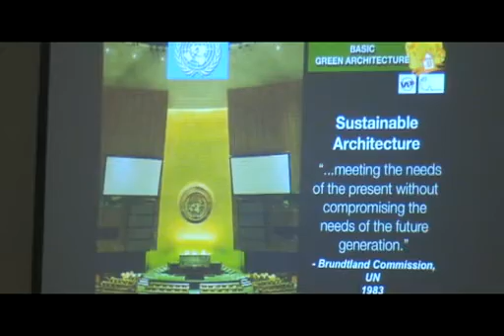This is sustainable architecture. This is the definition that's worldwide accepted. It started in 1983 by the Brundtland Commission, the UN Brundtland Commission. It says meeting the needs of the present without compromising the needs of future generations. In layman's terms, whatever resources we are using today, let's save some for future generations. It's about being unselfish.

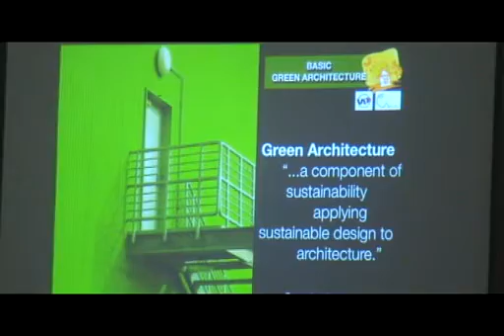What is green architecture? This is the definition from GAN, from our next speaker later. It says it's a component of sustainability, applying sustainable design to architecture. There are many elements of sustainable development and sustainable architecture, so green architecture is just part of the sustainable issue or development.

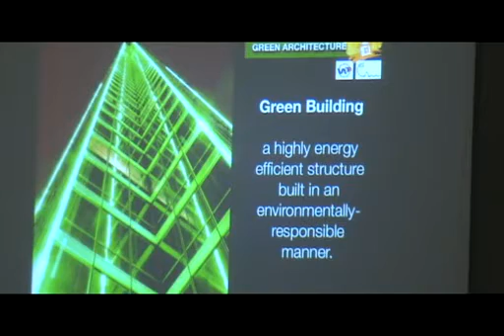What is a green building? A green building is a structure that is very efficient in energy, very healthy also, and environmentally sensitive. And green design is a process where the end result is sensitive to the environmental impacts on all living beings.

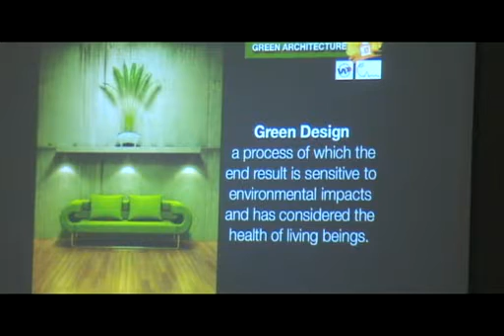Why green architecture? A lot of people are saying, let's not do green architecture, let's just do what we learned back in college. But remember that change is constant, so we have to accept change.

There are 3 major environmental crises identified. This is the generation wherein we have to cure this crisis, or give solutions to the crisis we are now facing. Number 1, energy crisis. If you go to the internet, peakoil.net, there's a whole blog exchange of information.

The scenario is scary because it says gas is already running out. There are many reasons why Arab countries are developing their tourism, and it has something to do with the dwindling gas resources. It says there's a prospect of both oil and gas shortages in the rest of the world, and the first ones affected will be developing countries - that's us. It's a scary scenario if you look at it.

The second major environmental crisis is water crisis. In the Philippines we say we have a lot of water, we won't run out. But remember the Aral Sea? It was irrigated, and now it's very dry. It was the fourth largest lake, a body of water, but now it's totally dry. So it's true that water is running out.

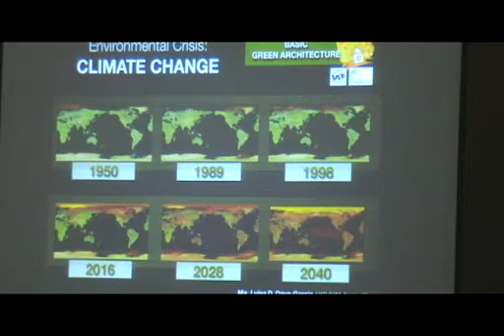This is the biggest challenge of all - climate change. These are charts. In the 1950s, this was the recorded heat. You'll see there's a little red line there showing the heat of Earth during that time. This is what we were feeling before.

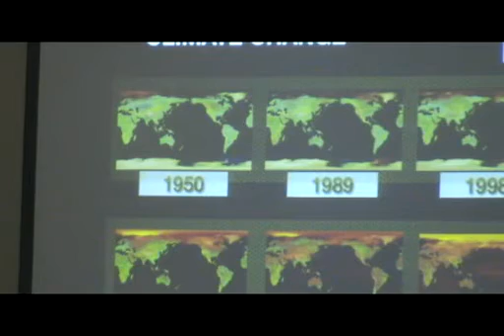It progressed to 1989, 1998 - sometime 11 to 20 years ago - measuring heat gathering and adding up. From 2016 up to 2040, this is computer simulated. So here in 2016, just a few years from now, less than 10 years, it's already going to be very hot.

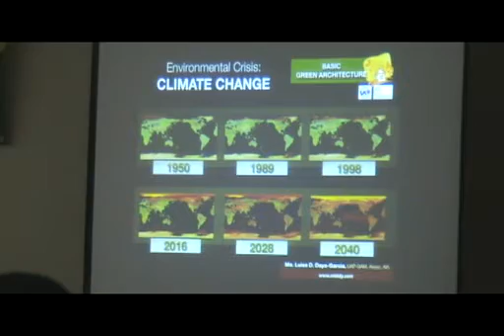I believe you can feel this already. Our weather patterns are very irregular, and every summer it's getting hotter and hotter. By the year 2028, they say it's already going to be unlivable, very very hot. And by 2040, they're saying a lot of species will be dying when that happens.

So what do we do? Why is green architecture very important to designers, architects, real estate developers? This is data from the United Nations also. It says that buildings - this is the output of buildings - 12% of the world's water is consumed by buildings, and 40% of the world's greenhouse gas emissions are from buildings.

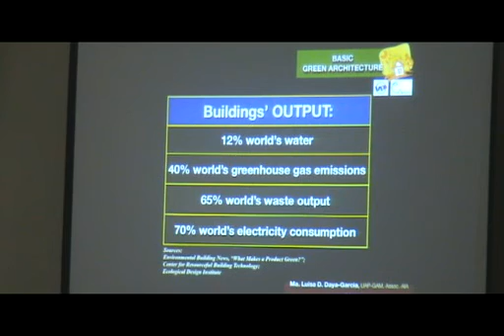Imagine 40% - this is not the transportation we're talking about, not the gas or jeepneys you see in the news every day, this is from the building. And this is the cause of climate change, greenhouse gas emission. 65% of world's waste output is also from buildings - construction waste, manufacturing of construction products, up to maintenance - 65%. And then we have 70% of the world's electricity consumption.

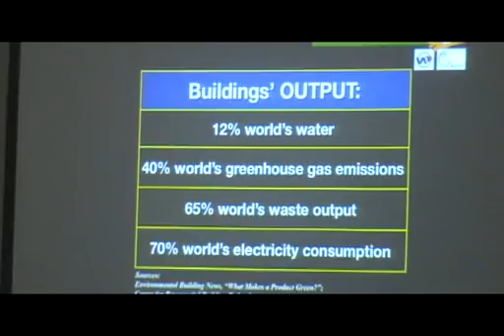That's a lot. This is the reason why architects are very important, builders, developers - because we are the ones doing the buildings. So the solution to all of those problems can only be green architecture.